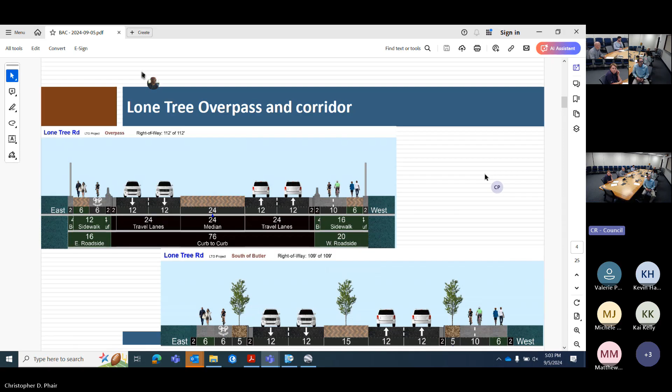Great, any other comments on this project before we move on? You said construction starts end of this year? FY24 is this year? It was actually, now we're in FY25, technically by city standards. So I think it was supposed to have begun this year, but there's one big holdup.

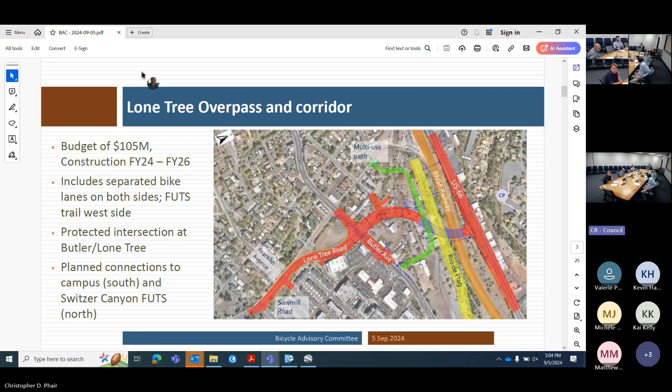It's relocating a light industrial facility. Finding an adequate place to move them has been holding things up on this whole project. But I do believe the first phase of construction is supposed to be from south of Butler to O'Leary. That's where they're going to begin, and that section will have the separated bike lanes. And it's really ready for it. If you look at the right of way available through there, there's a massive swath of pavement that's not really a lane for anything. I think it's going to be good.

I'm excited about this one. I used to live on O'Leary and walk the Sinclair Wash to South Campus every day. Right, good to move on.

Okay, Butler and Fourth Corridor improvements. This project goes from around the I-40 interchange on Butler Avenue and extends east past its intersection with Fourth Street, right up to the Sinagua Heights area. It's a pretty substantial section of roadway that currently doesn't have good ped-bike facilities, really no ped facilities at all. The budget is $16.4 million.

Construction will be done between FY24 and 26. It'll introduce separated bike lanes on the north and south sides of the street, and two roundabouts—one at Herold Ranch Road, which is being designed with consideration to the truck traffic from the truck stops there. It seems like every truck on the south side of the road will be routed to the right, having to go around the Herold Ranch roundabout to get back to the interchange—a method of managing truck traffic better through an area that's been a problem.

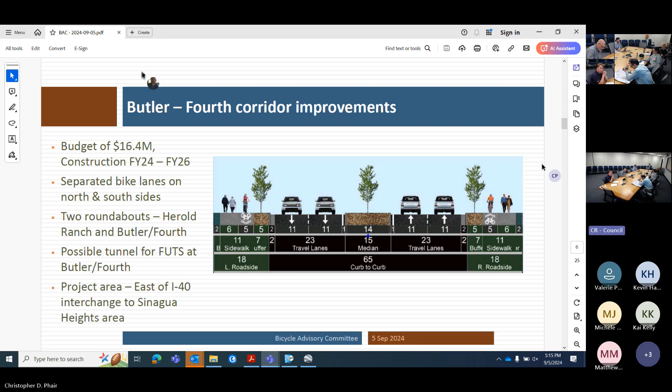Downtown Mile. This project has a budget of $117 million. Construction is expected to take place between FY25 and 28. It's a collection of many different pedestrian and cyclist network improvements. These include two underpasses of the BNSF. One is at Florence and Walnut—Florence is the street that goes through La Plaza Vieja, and it would connect to Walnut on the north side of the tracks, creating a really nice, low-traffic commuter connection for pedestrians and bikes. The second underpass is closer to downtown proper and the new downtown connection center, also beneath the BNSF railroad tracks.

Also included, and not really pictured here, are enhancements along Milton Road that include separated bike lanes on both sides of the underpass. I'd say the project is centered around this big railroad bridge improvement—it's going to add a third rail line on top of the bridge and also expand right of way beneath it. This intersection is getting completely rebuilt as well. We have some more pictures to represent some of these changes that will come.

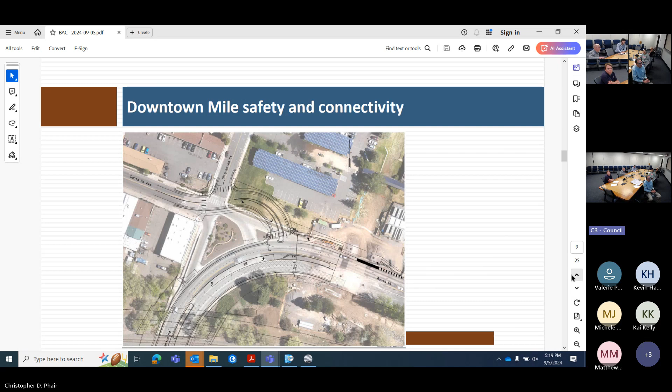The accessible ramp, which is used by bikes as you mentioned, will come out but it will be replaced. Can you go to the image of the intersection? I think it's the next one. Yeah, so this doesn't show, and these plans are evolving, so some features of this may change, but we're trying to keep on top of it.

So the stairs in this scenario will stay. The ramp will be removed, as well as that slip lane for vehicles. Now that goes adjacent to the intersection, which has the highest proportion of rear end crashes in the Western Hemisphere. Wow. And I don't exaggerate.

I've done a case on it. People are coming down and somebody's looking way over their left shoulder to pull out into traffic, and they start to go a little bit, and the person behind them assumes that they're going, starts going and runs into the back of them. It's very regular. Well, some people just roll straight through that stop sign.

So what that current ramp will be replaced by, this shows a sidewalk kind of on the south side of Santa Fe that curves around and then connects into Route 66. So that'll become a bikeway essentially, and it won't follow the road so directly. It will follow more closely to the road underneath it, kind of more like that. I think it's intended to be a directional bikeway, but it may support two directions.

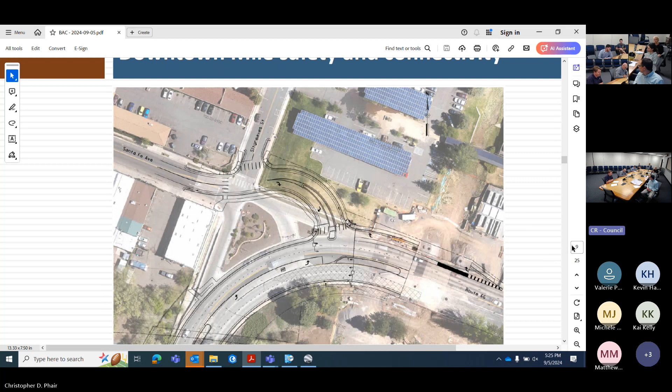So FY28, we should see that? FY28 is the completion date for that? Let's see, 25 to 28 for this slew of improvements is what's projected. Any of them slated first? I'm not sure, Martin, is there an order these are gonna be introduced? I don't know, I think generally all at once.

And what does this blue signify again? That blue is the new train bridge. So that's for pedestrians too? Not at the same grade as the trains. There won't be pedestrian facilities that parallel the BNSF there. That's just adding a third rail, expanding the right of way beneath the bridge, the train overpass, and they'll improve the clearance a little bit, so we have fewer issues with trucks going underneath and getting stuck, going under it and then stopping.

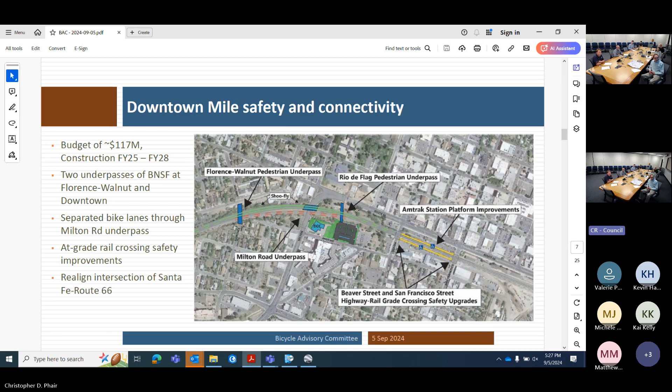Any other comments related to this? Okay. So this is kind of related, not related to any one project — it's kind of related to the downtown mile improvements. But we just wanted to identify this section of our primary planned bike routes.

This square is in the middle of pretty much the heart of the city, and it has solid bike connections that go north, south, east, and west. This one is largely in place, the Karen Cooper Trail. This one is largely in place, the Route 66 trail. And the remaining connections would be the Milton Bikeway and the Santa Fe FUTS Trail extension. We'll get into more detail about the status of these as planned projects, but we wanted to highlight what we're really going for as far as a primary bikeway that reaches each end of the city and links up in the middle of town.

Any other points on that, Martin? The darker ones highlight four that represent the four cardinal directions, although Flagstaff is tilted, so these are tilted as well, at least in this part of town. So we're coming in from the east, north, west, and south, and that square is how they interact in the middle, so if you're transitioning from one to the other — it's a roundabout, yeah, on a grand scale.

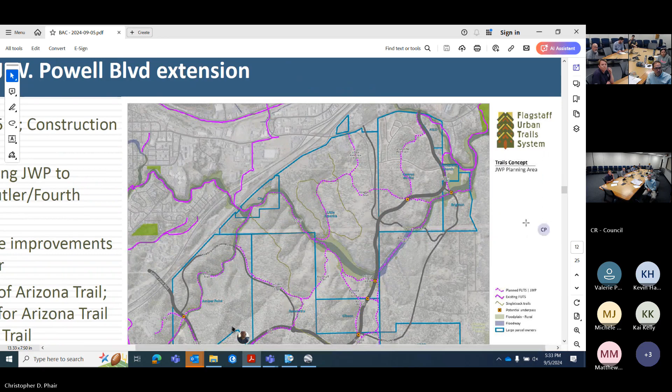This area is a little bit difficult map to read. The west end is Lone Tree Road, here, where it tees into J.W. Powell. The other end of it is the intersection of Butler and Fourth. So JWP will form that south leg, which is now called Dog Pound Road - I think that's a gravel road out to the Humane Society.

You can see I-40 goes through diagonally here, so this is that area. This thing is like driving a bumper car - it's easier to look at your screen and not focus on that.

Less janky - so some of the primary routes are that this is a trail in the bottom of the Bow and Arrow Wash. There's a two-track road that goes there now. It's actually really popular and a really scenic canyon. It goes around the corner - this is part of the canyon of the Rio de Flag.

What you see here are three different options for how we connect through those private parcels and get across the John Wesley Powell future alignment. This one is probably least likely to happen - it's more likely to be one of these two.

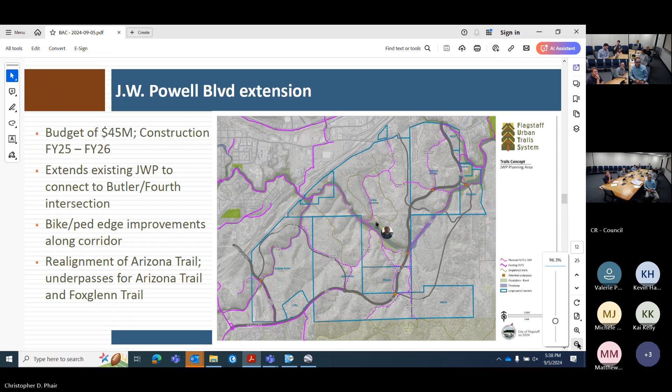Any other comments? All right, keep moving.

Okay, the Rio de Flag flood control. This project has a budget of $122 million. Construction is anticipated between FY25 and 30. This work will bury the Rio as it is currently aligned in multiple locations to help manage flooding, especially in more developed or urban areas of the city. This project will also extend the Karen Cooper Trail north of City Hall to Phoenix, and it will pave the Karen Cooper Trail a bit further beyond that.

As far as burying the Rio is concerned, it's kind of interesting. Outside of City Hall, for example, it'll largely follow its same alignment. However, they're going to excavate quite a bit and put a trench box with a cap on top of it that can handle significant flooding events. But through engineering, they're going to be able to allow some water to still be visible during those high flow events, just to maintain the character that the Rio de Flag contributes to the city, which I thought was pretty neat when I learned it.

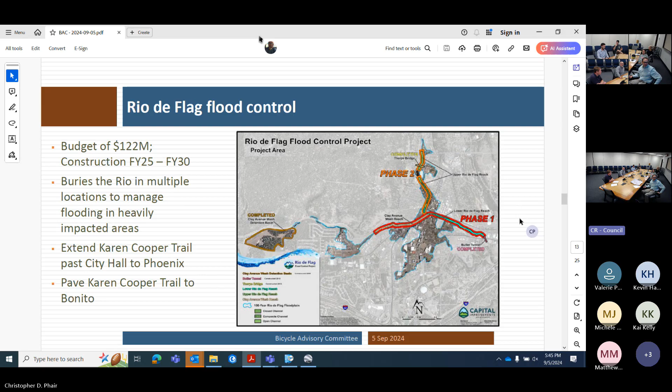All right. Up next is the Beulah University Roundabout. We all have some familiarity with what's going on in this area. It has a budget of $24.3 million and anticipated construction in FY 23 through 25.

It introduces, first, this new extended section of Beulah, with constructed separated bike lanes along the east and west sides. Then at each intersection leg crossing, there's a raised crosswalk.

I don't know if you've had the chance to drive this yet - the current Milton traffic control routes you through this area, if you're heading south on Milton. It's a pretty interesting design with the raised crossings to make vehicles pay attention. It doubles as a speed bump - it makes drivers have more care, and also provides visual separation between people crossing and drivers as they approach.

It also creates this new road, which is pretty interesting - I'm forgetting the name of it. Fresca's was the property owner, where the roundabout is going. Okay, there you go.

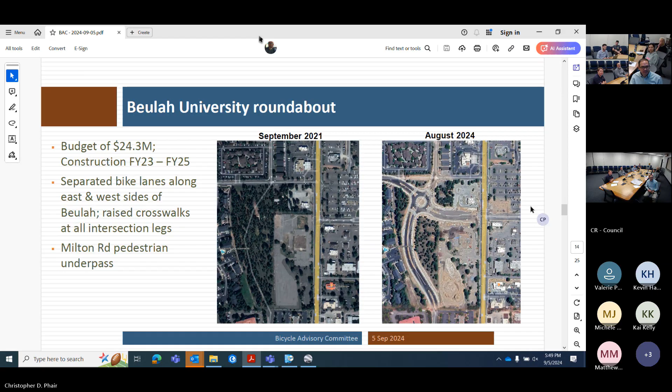Any other questions or comments related to this project? Okay, that concludes section 1 of old business.

Just before we go on to the next one, real quick context: there's a question that came up last time about the two underpasses, and the group had asked for an update on what's happening with those. So since we have new members and some of these things we haven't talked about for a while, we decided to give you an update on all these projects and where we are with pedestrian and bike accommodation with them. These projects were decided on long ago, and you don't need any input from us on this, it's already decided going in, for the most part. There are projects happening in a decade that you need our help with now, and there will be, probably sooner. Some of these projects are not fully baked; there may be aspects of them that we bring back to you for your thoughts and input. Okay, excellent.

Speaking of projects where we seek your thoughts and input, this next section is about all of our grants projects that we have going on that you've heard about at various points in time. Just an update and review of where things stand related to those projects.

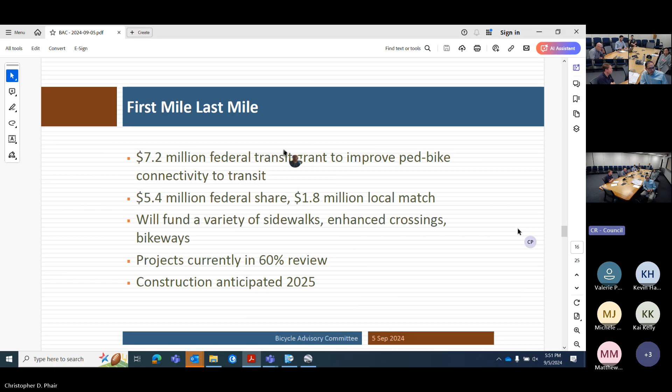We use two types of beacons. One is called a rapid flashing beacon, and it's the amber lights like at Butler and Humphreys, for example. A pedestrian hits it and the lights flash rapidly. It's not a traffic control device, but it is a visual enhancement - it shows cars that there's a pedestrian crossing.

Cars are required to yield to a pedestrian in a crosswalk anyway, so this doesn't change that. A HAWK or PHB is the red flashing lights, which is a traffic control device, so when the lights are steady red or flashing, you're required to stop. Compliance for those devices is in the 90s versus RFBs, where compliance is better than no RFB, but not in the 90%.

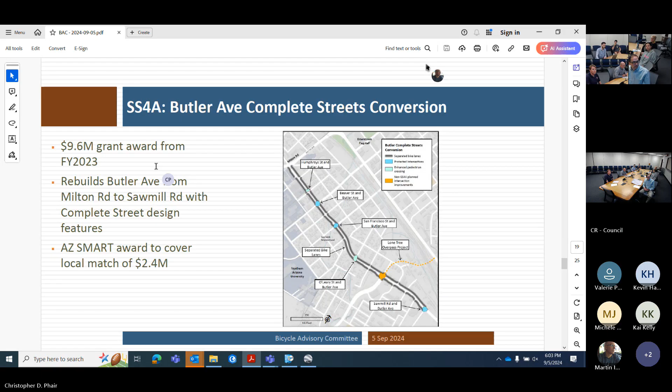All right, moving along. Here's more on it. This is the planned cross-section under ideal conditions. There are sections of the roadway where right-of-way is more constrained, so you'll lose this 5-foot parkway section, but you'll still experience vertical separation as a cyclist from the roadway.

So that's it. Comments? Keep moving.

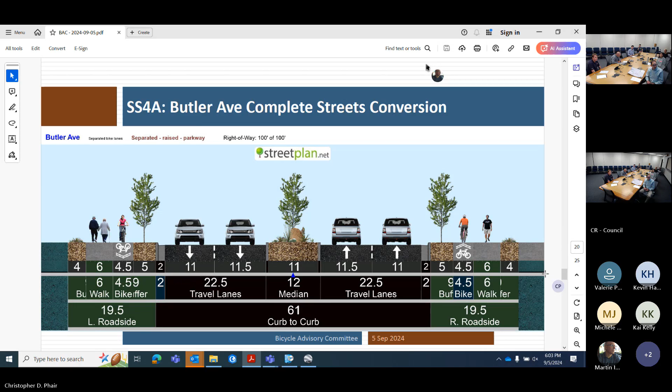Okay, next grants project, the Active Transportation Infrastructure Investment Program. We applied for concept plans for the Santa Fe Milton FUTS Bikeway. This was a fairly recent one. The grant application was for $509,000 to secure concept level plans for these 3 high priority projects as identified in the ATMP.

The projects included are the Santa Fe FUTS Trail Extension, which extends the Santa Fe FUTS from where it currently ends, east towards downtown, to formulate that primary bikeway square that we were talking about - it forms that western leg. Additionally, we would get concept level plans for the Milton Bikeway, which creates that south connection.

And all the way up to the downtown connection center, where that Rio project will build the underpasses to connect to the Karen Cooper. And the third component is the Milton Road Ped Bike Bridge, which would extend from the eastern end of the Santa Fe FUTS Trail over Milton Road near the Jack in the Box, going over the north side from Malpai across to NAU campus. That's only $500,000.

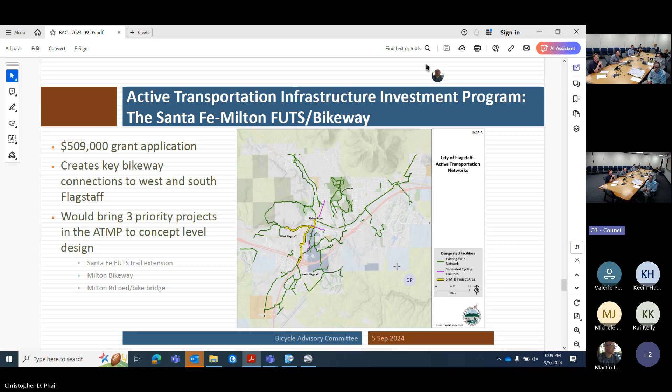Here we lumped together some of the other ongoing ones. This first was a Safe Streets for All grant application, not for implementation but for supplemental planning. This was a Metro Plan application - we partnered with Metro Plan for the Safe Streets Master Plan. The city had approximately $500,000 to $600,000 budgeted to create its transportation master plan, and through this grant we were able to leverage that money as the match for $2.4 million. So now we have more money to thoughtfully create our transportation master plan.

A grant agreement is underway, and the work will largely be taking place pretty much right away. It starts with a series of interviews of all different city stakeholders who will be impacted. It's going to be a longer process - I think we budgeted 4 years to spend all of the money, with different checkpoints along the way. I imagine there will be plenty of times we come to BAC looking for input.